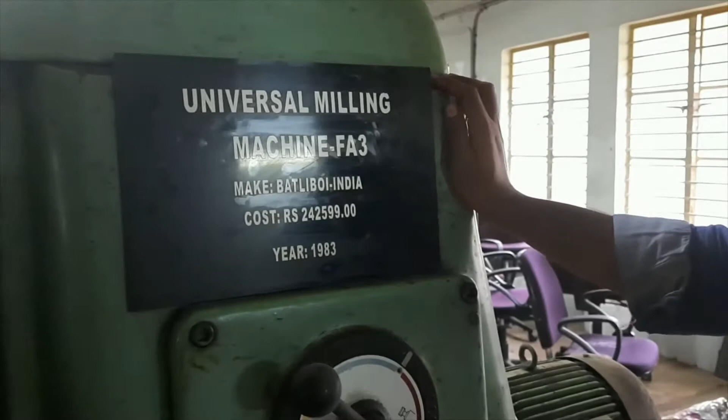We are discussing the universal milling machine. This is a universal milling machine, a kind of column and knee type milling machine. Its make is Batliboi, India.

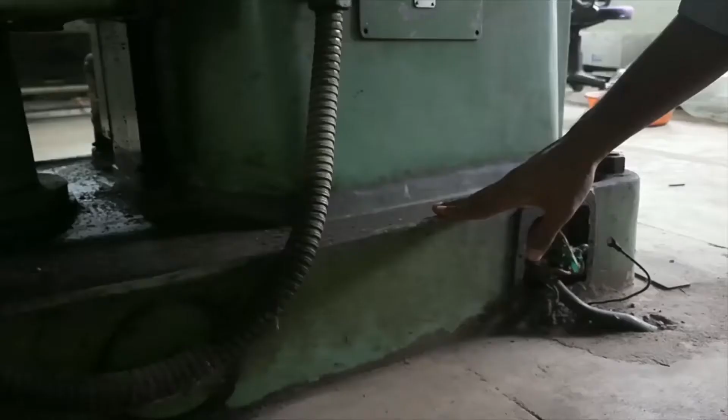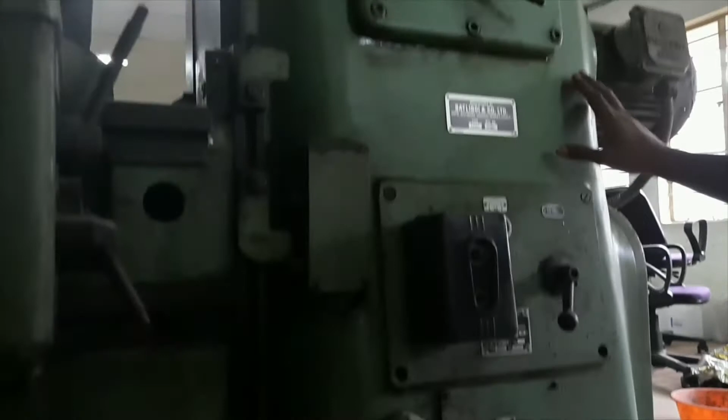Now we discuss the parts of the milling machine. It has a base, which carries all other parts of the machine, and a vertical column, which carries all other driving mechanism of the milling machine.

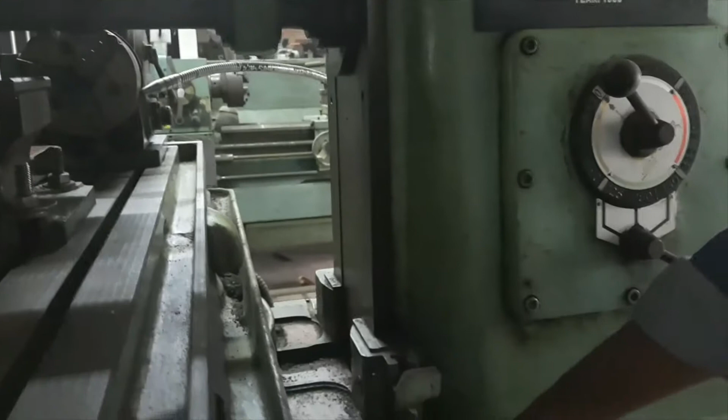It has guideways, in which the knee is moving. This is the knee, and it also has an overhanging beam. This overhanging beam carries an arbor which is connected to the spindle, which is also carried by the housing.

There is a cutting tool, a multi-point cutting tool. This is a module cutter, and it performs the metal removing operation.

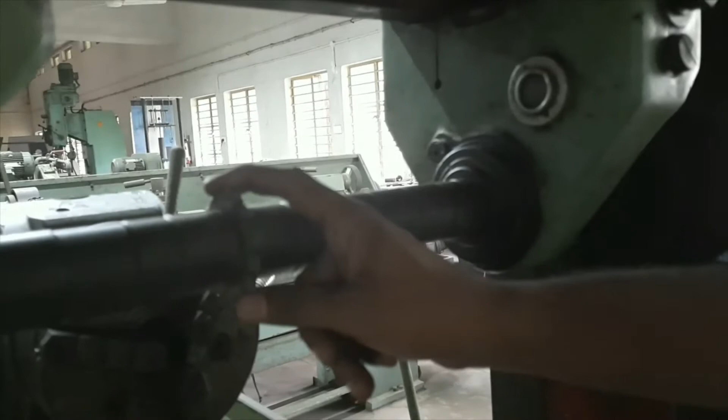Now discussing the knee movement. As we know, the knee moves along the linear guides. The knee movement is possible by rotating this wheel along the Z direction. This is how we adjust the knee movement.

Now here we have the bed. The bed can move in four directions. One is the X direction, which is operated by the wheel along that side.

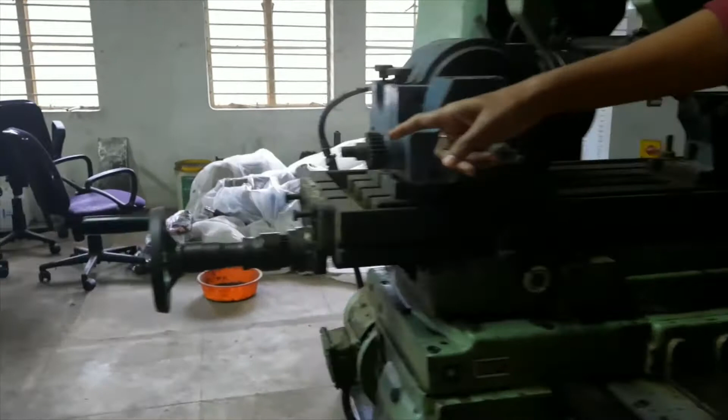The bed can also move along the Y direction, controlled by this wheel. It can also move along the Z direction as well as along an angle, so rotational and angular movement is also possible for the bed.

We will see the chuck of the universal milling machine. This is the chuck, in which we hold the mandrel, and on top of that we hold the workpiece. This is the tailstock, used to support the mandrel as well as the workpiece.

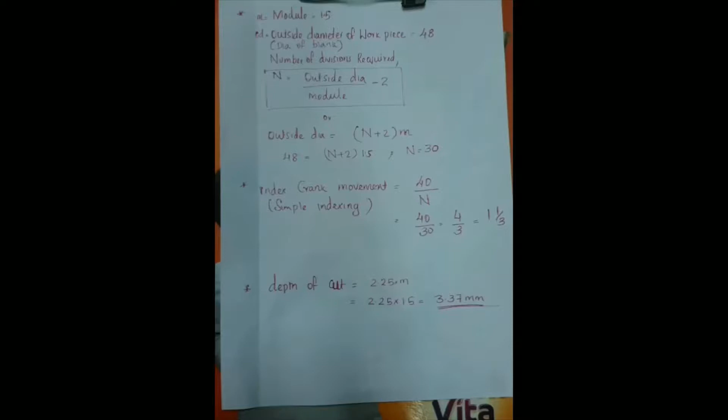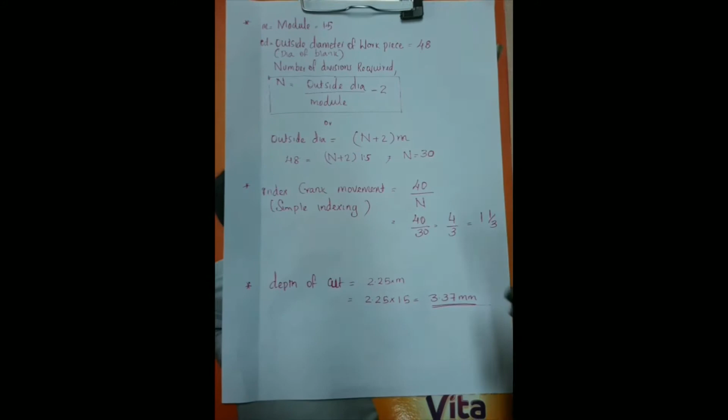Now we are in the calculation phase. We know the module of the cutter is 1.5, so we have to find the outside diameter of the workpiece. This is the workpiece blank, fixed to a mandrel, already made on a lathe machine. For measuring, we use a vernier caliper. From the measurement, we get the outside diameter of the workpiece as 48.

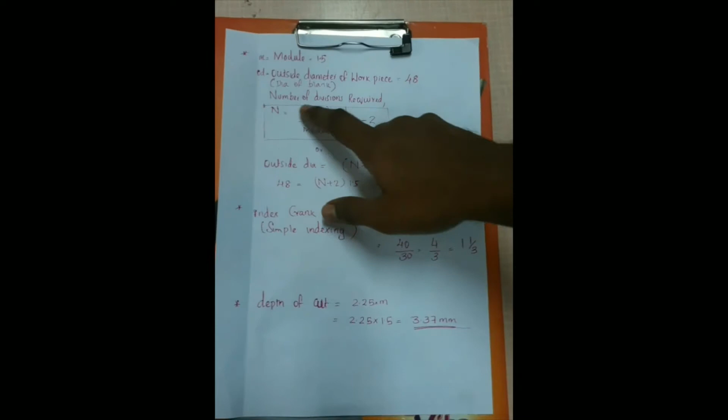To find the number of divisions, we have an equation: outside diameter equals number of divisions plus 2, into module. By substituting values into that equation, we get the number of divisions equal to 30.

Next step is to find the index crank movement. We are using simple indexing. We already discussed there are different types of indexing: simple indexing, direct indexing, and compound indexing.

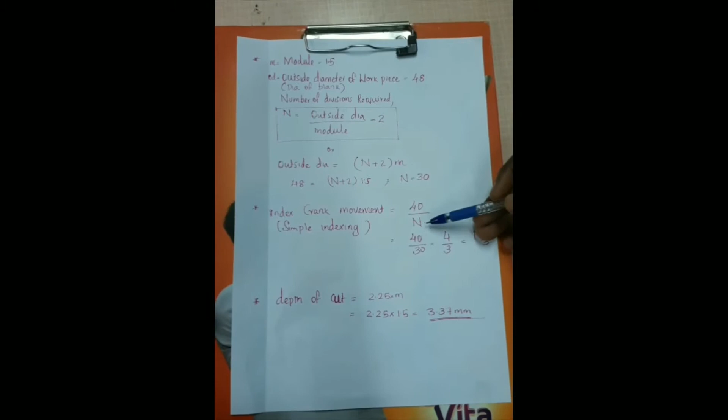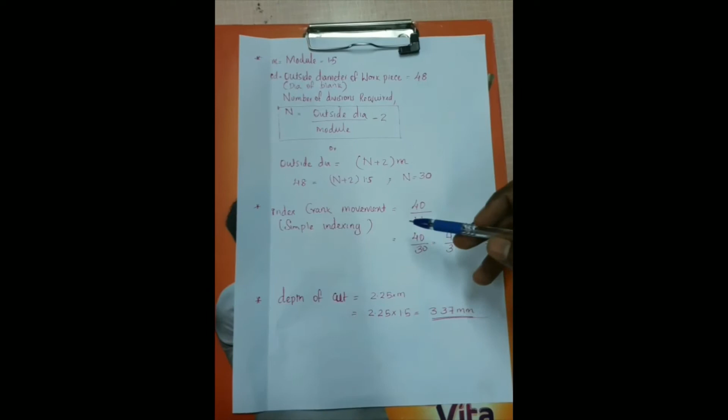For simple indexing, the equation is 40 divided by n. Here n equals 30, so 40 divided by n gives us 1 1/3, and this value should be applied to the crank, applied to the indexing mechanism, to get the index crank movement.

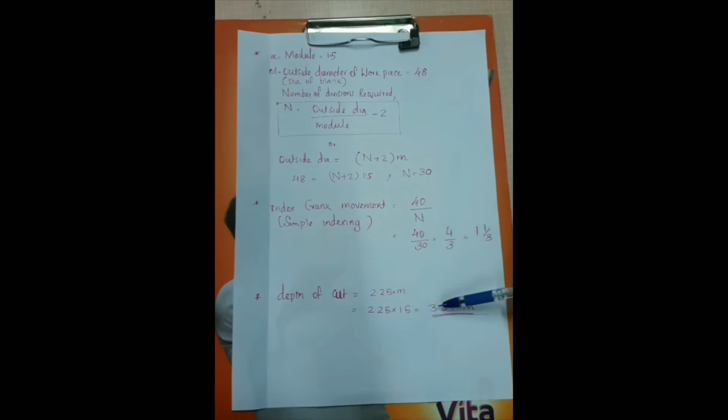Next step is to find the depth of cut. We have an equation: depth of cut equals 2.25 into module. Substituting the value of the module into the equation, we get the depth of cut as 3.37 mm.

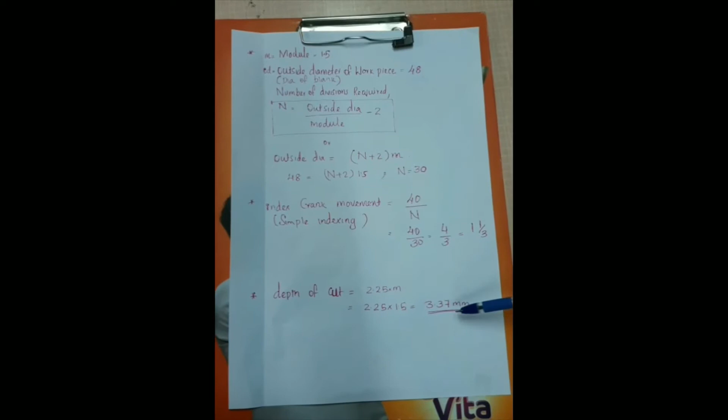Now we'll discuss the indexing mechanism in the universal milling machine. Indexing is done to divide the periphery of the workpiece into equal parts. We have three types of indexing mechanisms.

First is the simple type indexing mechanism. Next is the direct type, and we also have another one, the compound type indexing mechanism. In this case, we'll go for the simple type indexing mechanism.

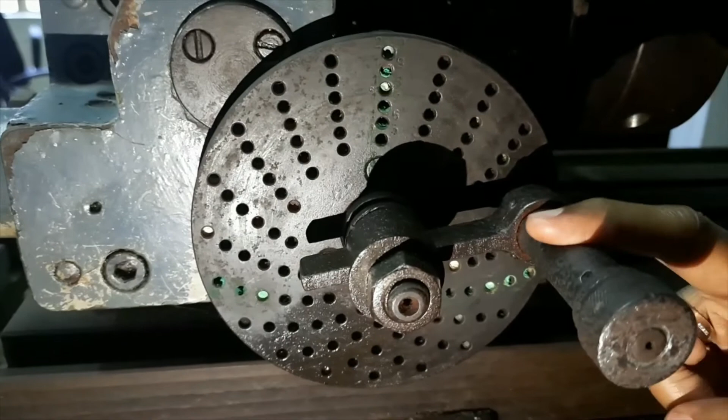This is the indexing plate available to us, and this is the indexing crank. The indexing plate has equally spaced concentric holes along it, and these are the scales that correspond to the equally spaced holes.

From the calculations we did earlier, depending upon the indexing value, we select a scale. Since our indexing value was 1 1/3, we select a multiple of 3. In this scale, we observe that 18 is a multiple of 3.

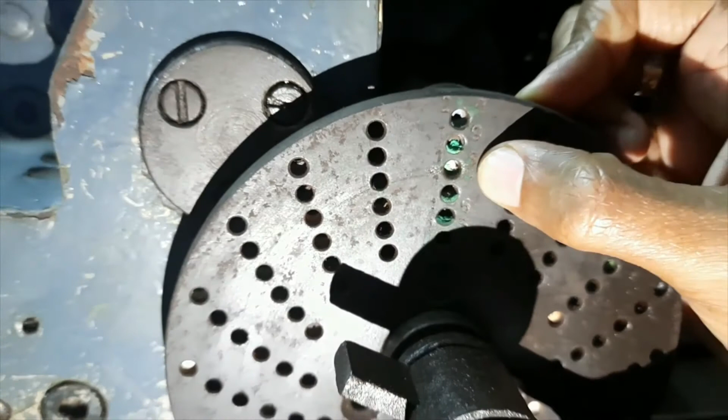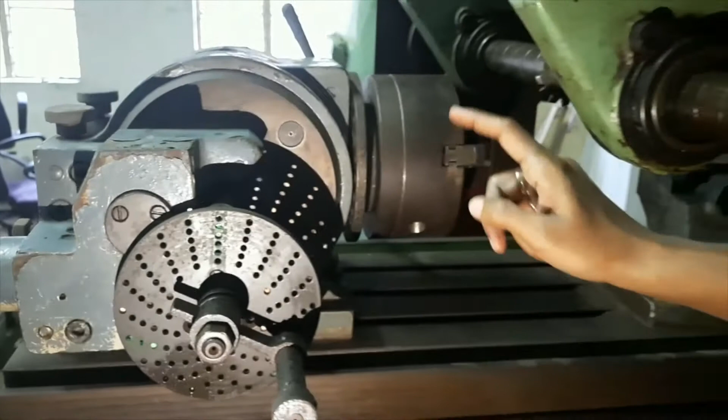We'll place the indexing crank over here, then give a rotation of 1 1/3. First we give a full rotation like this, then go for 1/3 of the rotation. Based on this, the rotation will be transmitted to the job. This is how indexing is done.

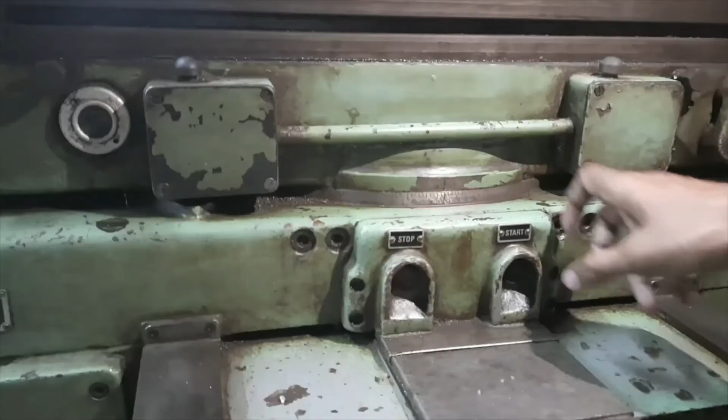As we can see, the workpiece is being tightened and attached between the chuck and the tailstock. Now we are going to start the machine. We can start like this.

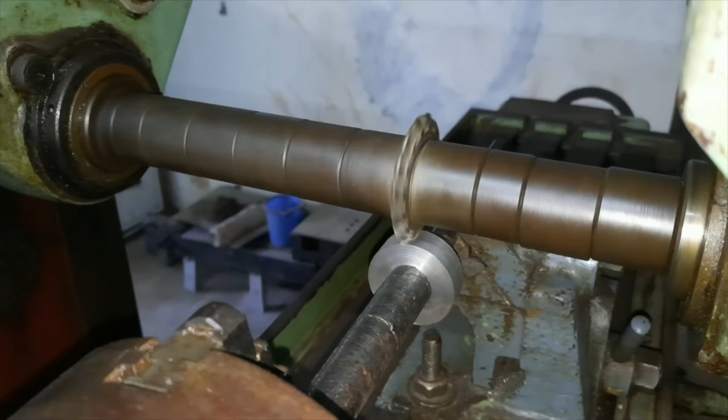By rotating the wheel, we make it a just-touching position, so it slightly touches the top of the workpiece. As we can observe, the cutter has just touched the workpiece.

Now we'll give the depth of cut based on the value we calculated: 3.37 mm. Since it is an intermittent cutting operation, we can't give 3.37 as a whole, so initially we give 1.5 mm depth of cut by rotating this wheel.

We'll be starting the cutting operation.

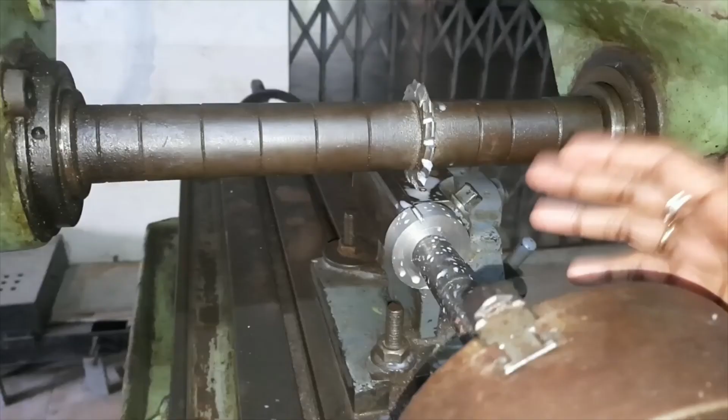Here we have completed one cut. Now we go for the indexing. The value we calculated was 1 1/3, so first we rotate the crank once and then give 1/3 of a rotation again. This is how indexing is done.

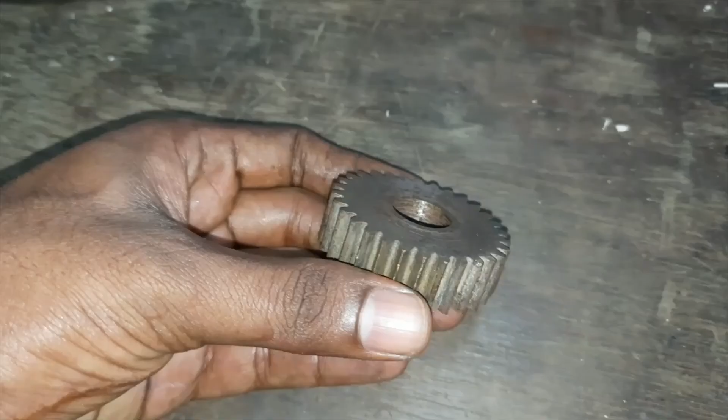Now we'll go for the repeated cuts. Once we have completed all the processes, this is the final product that we obtained.